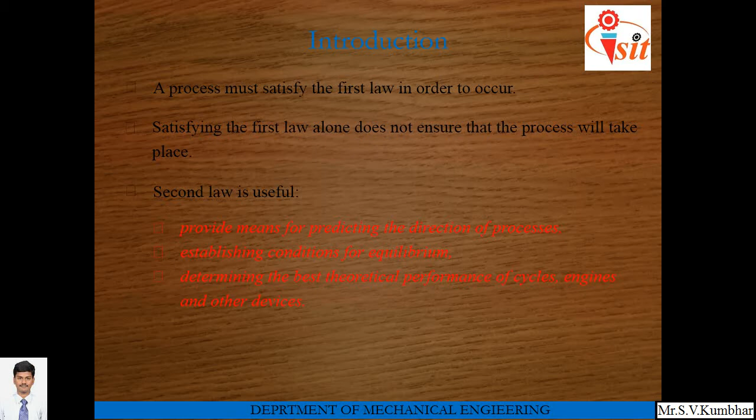So, limitations of the first law of thermodynamics. We will take one example. A cup of hot coffee does not get hotter in a cooler room. So the first law of thermodynamics does not give the direction of heat flow, whether heat transfer takes place from hot fluid to cold fluid or from cold fluid to hot fluid.

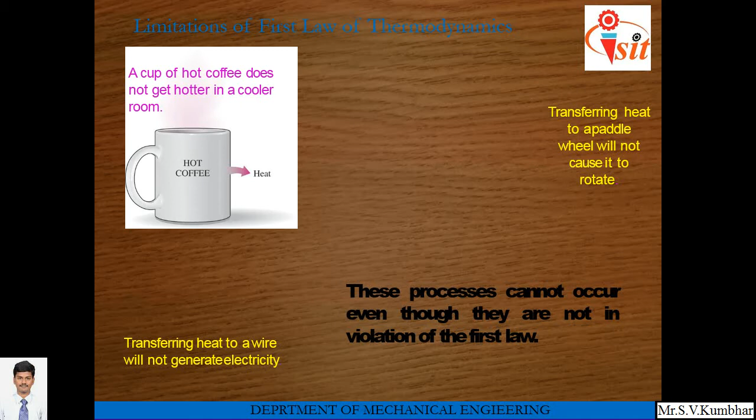In this first example, hot coffee kept in a cup is placed in a colder room. So what will happen? Heat transfer will take place from the cup to the colder room, and not from the colder room to the hot cup. So here the direction of heat transfer is not explained by the first law of thermodynamics. A cup of hot coffee does not get hotter in a cold room; it will definitely get cooler because heat will transfer from hot coffee to ambient air. This is the first drawback of the first law of thermodynamics.

Transferring heat to a paddle wheel will not run, or cause it to rotate. Lowering down a weight will rotate the shaft which is connected to the prime mover, and it will generate heat by rotating the paddle wheel. But if you supply heat once again to the paddle wheel, it will not cause the paddle wheel to rotate, and it will not cause the lowering down of that weight. This is the second drawback of the first law of thermodynamics.

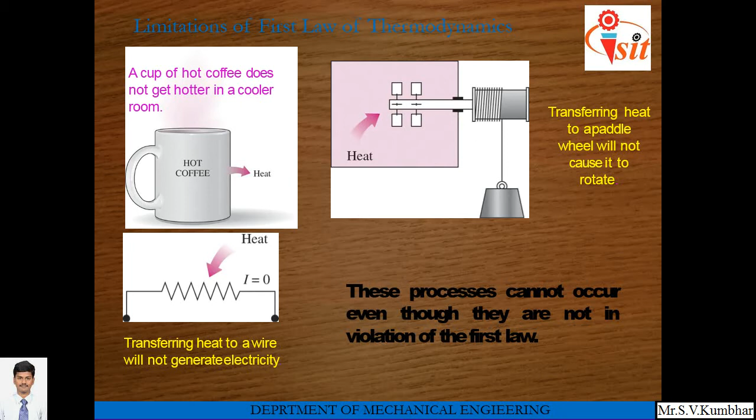Third drawback: as we know, when current passes through resistance, heat energy is produced. Here, if we supply heat energy to resistance, it will not generate electricity. These processes cannot occur even though they are not in violation of the first law. So these are the limitations of the first law of thermodynamics.

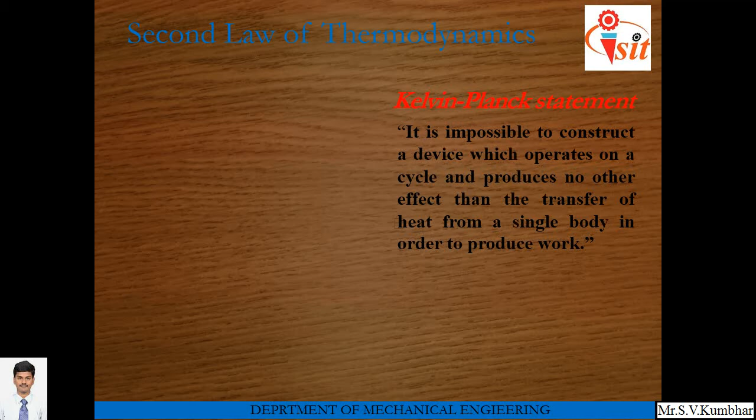Second law of thermodynamics: first, the Kelvin-Planck statement. It is impossible to construct a device which operates on a cycle and produces no other effect than heat transfer from a single body in order to produce work.

The statement is: it is impossible to construct a device which operates on a cycle which produces no other effect than transfer of heat from a single body in order to produce work. There is not a single engine having 100% efficiency. Whatever amount of heat is extracted from the thermal reservoir, it is given to the engine which produces work continuously. So if we consider 100 kilowatt heat extracted from the thermal reservoir, that 100 kilowatt will not be converted into work done, since loss is there. So no heat engine can have a thermal efficiency of 100%. If 100 kilowatt heat is extracted from the thermal reservoir and 100 kilowatt of work is obtained from the engine, we could say that its efficiency is 100%, but this is not possible.

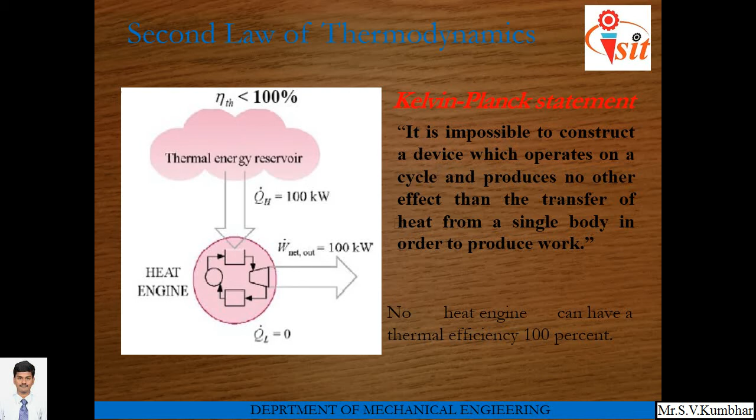But heat engine does not have 100% efficiency. We will see the details of heat engine in the next slide. So, what is a heat engine?

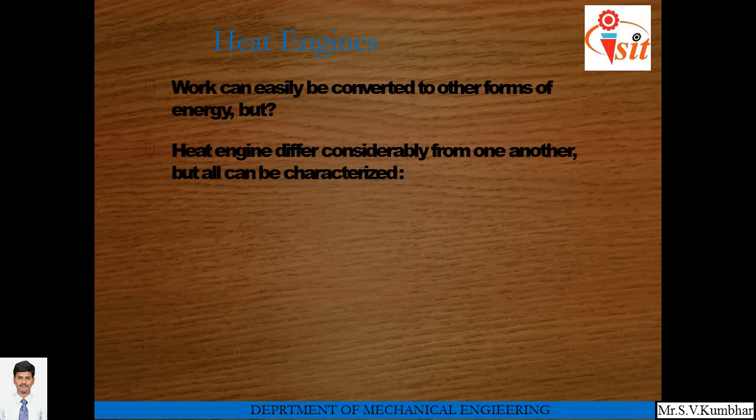Heat engine is a device which extracts some amount of heat energy from a heat source, and that heat energy is liberated to a heat sink, and by doing so it produces work.

So in a heat engine, some amount of QH is extracted from the heat source. That heat is utilized by the engine, and while doing so it produces work done. Work is obtained from the heat engine, and some amount of heat is rejected to the heat sink, that is the cold sink.

So heat engine receives heat from a high temperature source, and it converts this heat energy into work. It rejects the remaining waste heat energy to a low temperature sink, to atmosphere. They operate on a cycle, so the final state and initial state are the same.

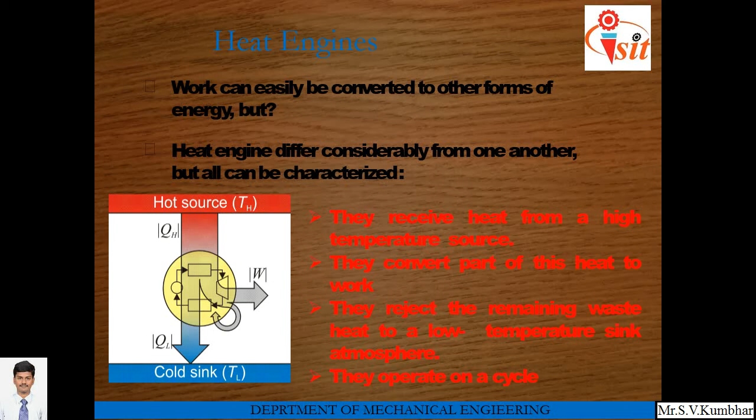The boiler works as energy source, such as a furnace. Heat is produced in the boiler by burning coal. That heat energy is utilized to convert water into steam. This steam expands in the blades of the steam turbine, where heat energy is converted into mechanical work.

Due to continuous expansion of steam, heat energy is converted into mechanical work, that is continuous rotation of the shaft. This shaft is coupled to the generator which produces electricity. Because of the expansion of steam, its pressure drops down.

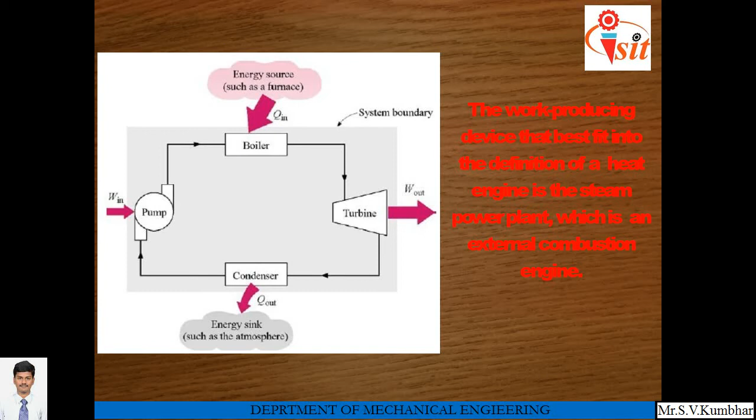Coming back to thermal efficiency, what is efficiency? In general terms, efficiency means output upon input. If any process is executed, its output and input are observed, and the ratio of output to input is known as efficiency. Thermal efficiency represents the magnitude of energy wasted in order to complete the cycle.

For example, if we consider an internal combustion engine, if its thermal efficiency is 40%, what does it mean? Only 40% work is obtained from the engine, even if 100% heat is supplied. So 60% heat is going to waste. Thermal efficiency is a measure of performance, that is called thermal efficiency.

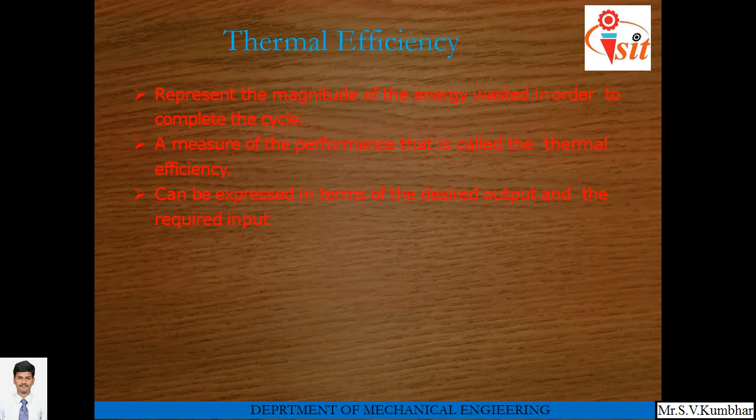Thermal efficiency can be expressed in terms of the desired output and the required input. So we can represent thermal efficiency as the ratio of desired result to required input. For a heat engine, the desired result is the net work done and input is the heat supplied. The desired result, net work, can be calculated by subtracting supplied heat minus rejected heat.

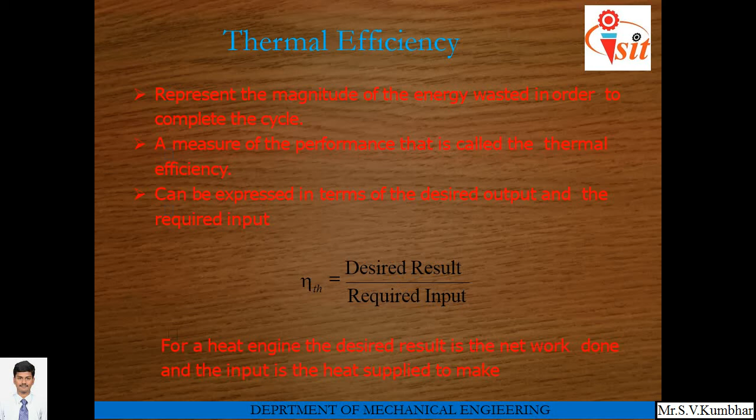The thermal efficiency is always less than 1, or less than 100%. So thermal efficiency can be represented as net work done, that is the output, upon heat supplied, that is input, Q in. The net work done is calculated by Q in minus Q out, or W out minus W in. So Q in must not be equal to Q net.

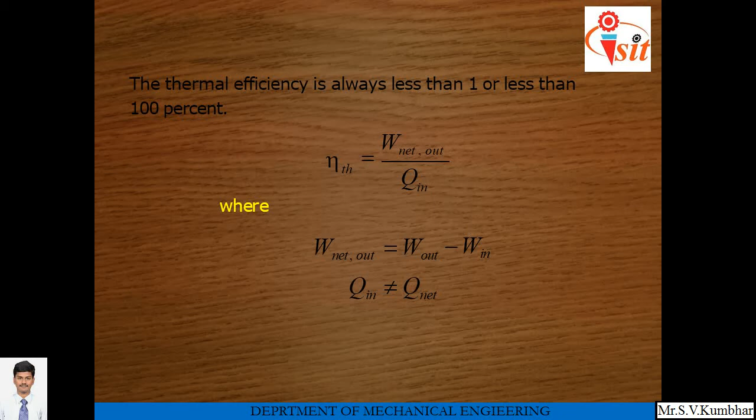Therefore we can rearrange, or apply the first law of thermodynamics to a cycle. Q net minus W net is equal to delta U, so W net is equal to Q net, or W net is equal to Q in minus Q out, that is heat supplied minus heat rejected.

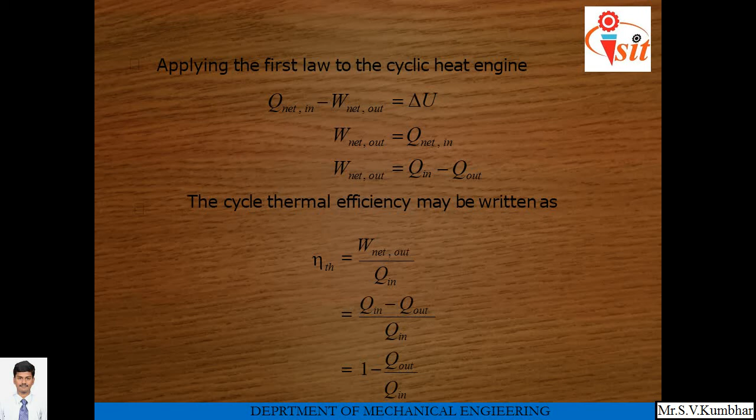So we can rearrange the term: thermal efficiency eta Th is equal to W net upon Q in. Replacing W net by Q in minus Q out upon Q in, we get eta Th, thermal efficiency, equals 1 minus Q out upon Q in. So thermal efficiency will not be greater than 100% or equal to 100%, it will always be less than 100%.

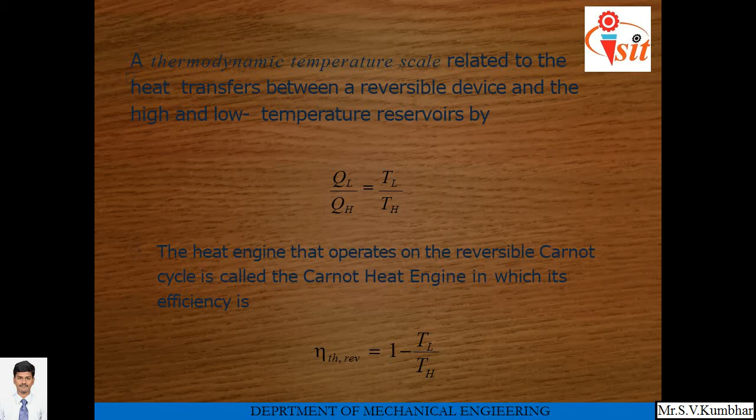A thermodynamic temperature scale is related to the heat transfer between a reversible device and high and low temperature reservoirs by QL upon QH, which is equal to TL upon TH. Therefore, the heat engine that operates on the reversible Carnot cycle is called the Carnot heat engine, and its efficiency is given as eta Th reversible, which equals 1 minus TL upon TH, where TL is the lowest temperature of the cycle and TH is the highest temperature of the cycle. You can also consider TH as the temperature of the heat source and TL as the temperature of the heat sink.

Next is the Clausius statement of the second law of thermodynamics. It is impossible to design a device which works on a cycle and produces no other effect than heat transfer from a cold body to a hot body. So heat will not transfer from a cold reservoir to a hot reservoir without expenditure of work. That is known as the Clausius statement.

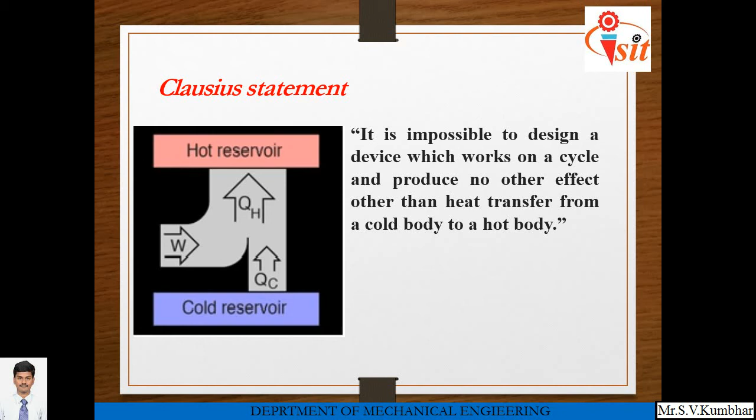If we consider an example, if two bodies are kept in contact with each other, a hot body and a cold body, heat will transfer from the hot body to the cold body until the temperature of both bodies becomes equal. That is known as thermal equilibrium. But if heat has to be transferred from a cold body to a hot body, some external work has to be applied so that heat will flow from the cold reservoir to the hot reservoir. The application of this is the heat pump and refrigerator.

A heat pump is a device which transfers heat from a low temperature medium to a high temperature one. The diagram shows a low temperature heat source and a high temperature heat sink. If you supply work to the heat pump, it will extract QL amount of heat and transfer QH amount of heat to the high temperature heat sink. The main purpose of a heat pump is to maintain the temperature of the heat sink greater than that of the heat source.

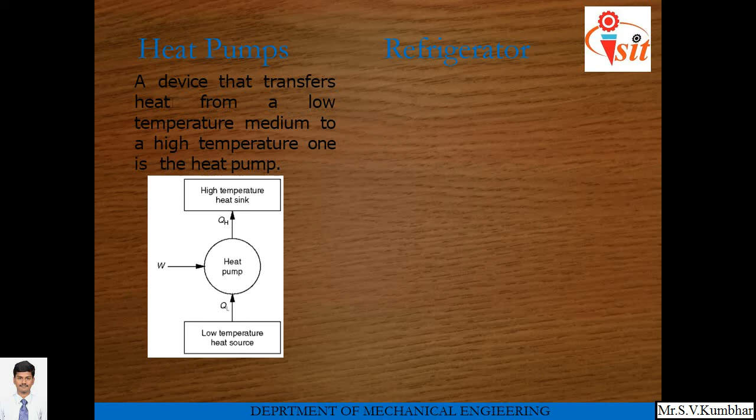A refrigerator is a device which operates exactly similar to a heat pump, but the desired output is the amount of heat removed from the system. In this diagram, a cold reservoir is at T2 temperature. The refrigerator extracts Q2 amount of heat from the cold reservoir and supplies Q1 amount of heat, which is the addition of Q2 plus W, to the hot reservoir, which is considered as atmosphere. The main purpose is to maintain the temperature of the cold reservoir below that of the hot reservoir, and for that purpose external work in the form of electricity is supplied to the refrigerator.

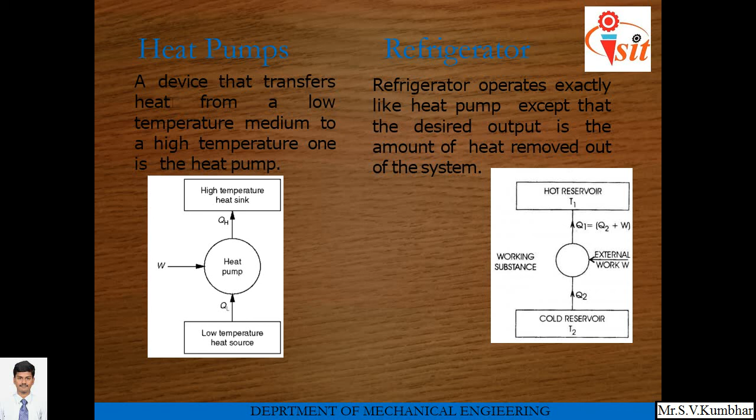The index of performance, that is the coefficient of performance, is expressed, which is very similar to efficiency.

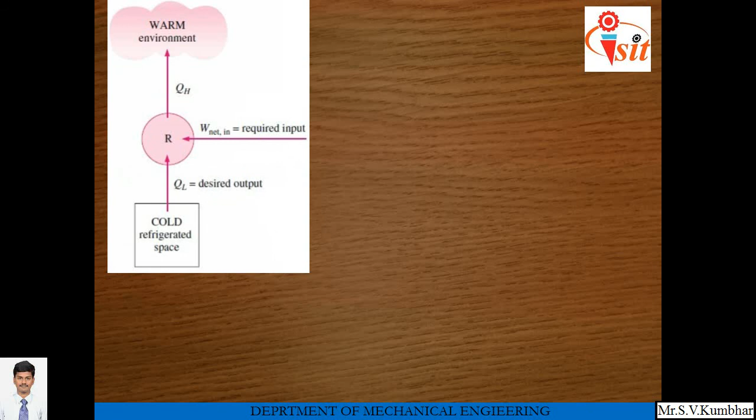Here is the line diagram for the refrigerator, and here is the line diagram for the heat pump. In the first diagram, heat is extracted from the cold refrigerated space and rejected to the warm environment, that is the atmosphere, and for that purpose we require input in the form of electricity. Heat pump and refrigerator work in a similar manner, but the outcome is different. Here heat is extracted from the cold environment and given to the warm house, and the main aim is to keep the space of the warm house hotter than the cold environment.

We will see how to calculate the COP of a refrigerator and heat pump. The coefficient of performance of a refrigerator is given as 1 upon (TH upon TL minus 1), that is TL upon (TH minus TL), where TL is the temperature of the cold refrigerated space and TH is the temperature of the warm environment. The coefficient of performance of the heat pump is given as 1 upon (1 minus TL upon TH), which equals TH upon (TH minus TL). Again, TH is the temperature of the warm house and TL is the temperature of the cold environment.

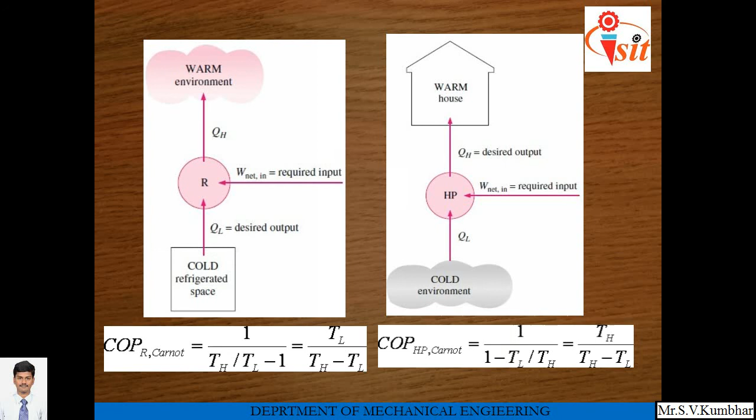The third law of thermodynamics states that the entropy of a perfect crystal is 0 when the temperature of the crystal equals absolute zero, that is 0 Kelvin.

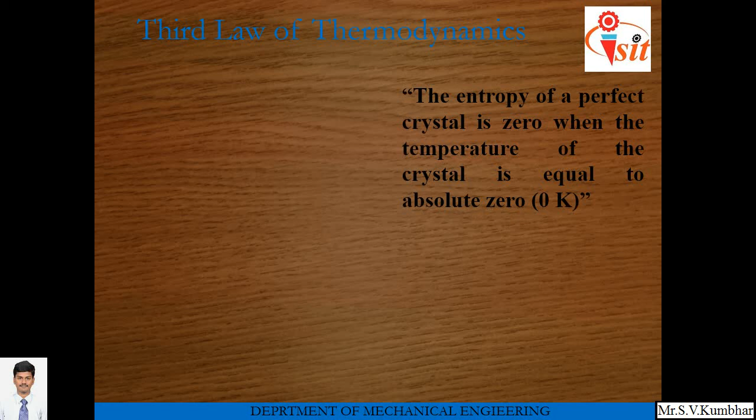Here one diagram is shown that the entropy of a pure crystalline substance at 0 is 0. Entropy is 0 at absolute 0 Kelvin. In order to learn the entropy concept, first we must know randomness. In this figure, 3 different bottles are shown in which a pure crystalline substance is taken.

In the first one, decrease in temperature decreases the kinetic energy of the molecules. Again, more decrease in temperature results in more decrease in kinetic energy, shown in the second figure. And in the third figure, at 0 Kelvin or minus 273.15 degrees centigrade, the movement of the molecules becomes 0, and this movement of molecules is known as randomness. So these 3 figures show randomness, and by learning this randomness concept we come to entropy.

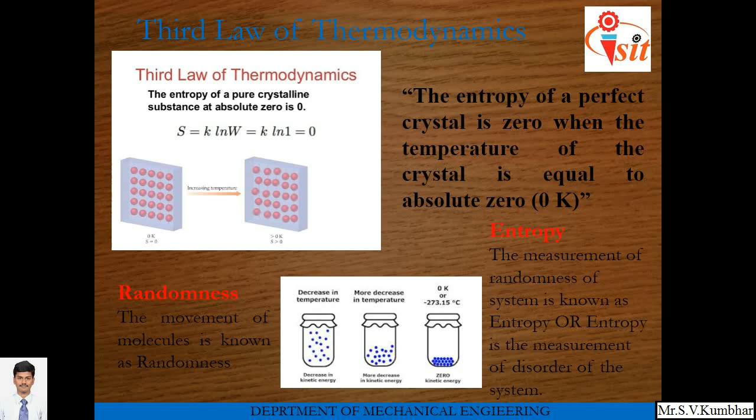The measurement of randomness of a system is known as entropy, or entropy is the measurement of disorder of the system. So the entropy of a perfect crystalline substance is 0 when the temperature of the crystal equals absolute 0, that is 0 Kelvin, or minus 273.15 degrees centigrade.